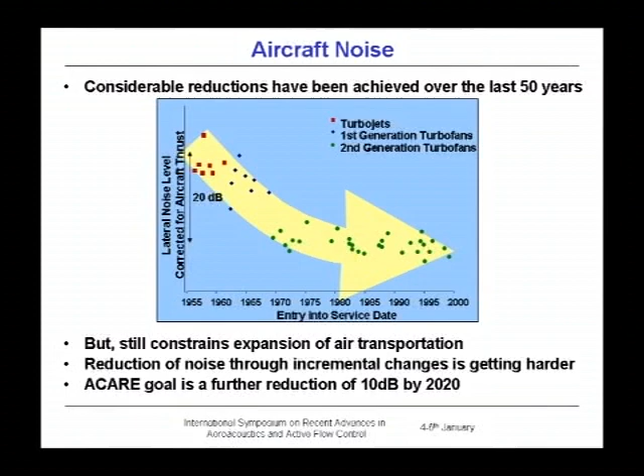I can be quick with this view graph because we've seen it already. But one message from this plot of noise against time is that some of the trade-offs from going to large bypass engines have now been cashed in, and it's getting increasingly difficult to reduce noise through incremental means. And yet aircraft noise still constrains the expansion of air traffic. No one wants an airport in their neighborhood, or even extra operational hours, or a new runway. So the predicted expansion of aerospace, significantly predicted over the next 20-odd years, could be much constrained by community objections, particularly to noise.

Now, if there's one thing I've learned from Shon Ffowcs, it's to try and ask the question in a different way. So suppose instead of saying, this is what aircraft look like, how can we model it, how can we make it quieter, we turn the question around and ask: if noise is really a constraint, what should an aircraft look like? That's what we're doing in the project that Tom and I are going to talk about today.

So we're asking, if we have as a target a radical reduction of noise, and by radical here we're thinking of an aircraft that should be imperceptible outside the airfield boundary in an urban environment. Not imperceptible in the heart of the country or over rural Wales, but in an urban environment it should not be a nuisance to the community.

Are you threatening to have an airport near me? Just a wind farm, I think.

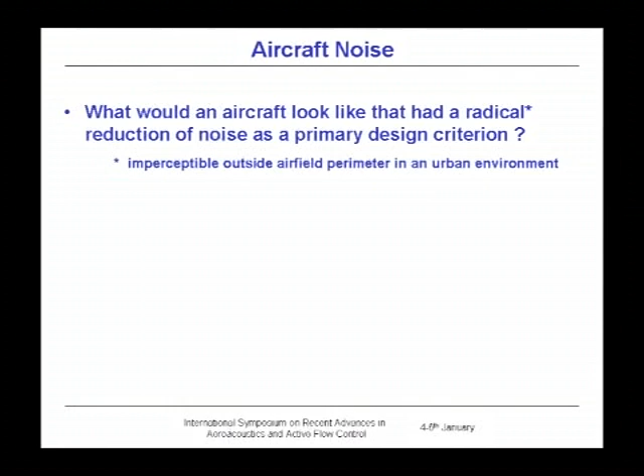In discussing this, Tom and I will be drawing on preliminary results from the Silent Aircraft Initiative, which has been running just about a year. It's a collaborative project between MIT, Cambridge University, and a growing community of partners, funded by CMI, the Cambridge MIT Institute.

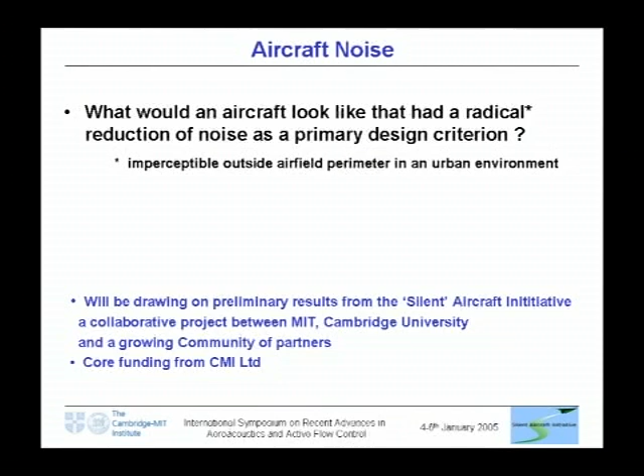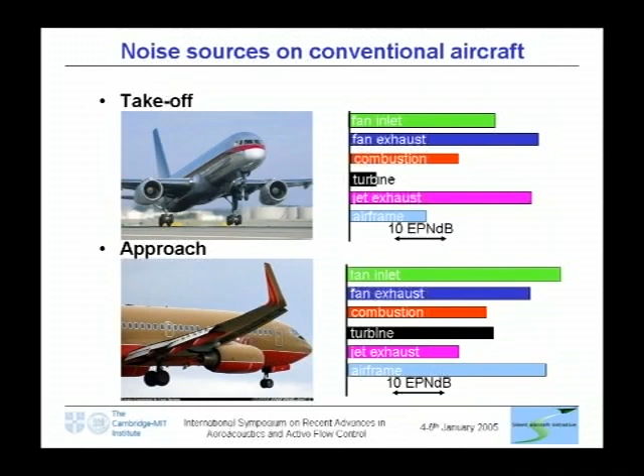Again, we've seen this one already. The message here is that at takeoff, fan noise and jet noise are really important. On approach, the fan is off-design, becomes even more important, and we've got a large contribution from airframe noise. So what can we do about those?

Well, first of all, design with low noise operations in mind is absolutely crucial, considering how the aircraft will be operated in order to minimize noise, feeding into the design very fundamentally. To achieve any of this, we're going to need much greater integration of airframe and engine, for example using the airframe to shield engine noise from listeners on the ground, and also to provide room for extensive acoustic liners.

Current ways of developing high lift just won't do. Slats are too noisy. And drag—if you think about it, an aircraft at altitude is going fast, it's got to descend and come into land.

It's got an awful lot of kinetic and potential energy to dump in doing that. Currently, that energy is dumped into the air, into unsteady motion in the air, in really noisy ways. The pilots lower the undercarriage much earlier than they need to for operational means, to get the drag up so they can dissipate some of their potential and kinetic energy. Flaps are used, again, almost like air brakes to slow the aircraft down, but these are noisy ways—that energy is going into unsteady air motions in a way that's noisy.

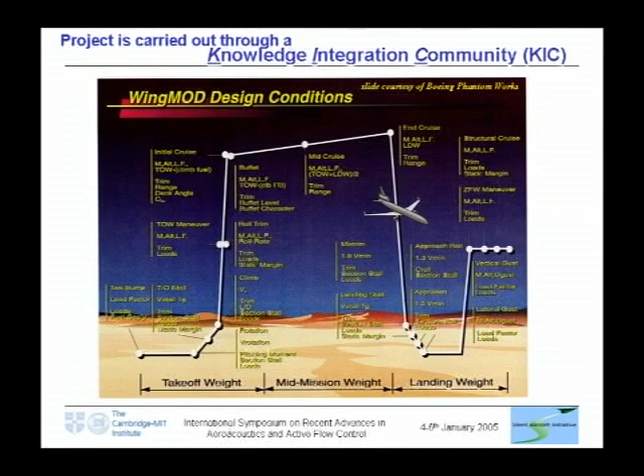On the engine side, we have installed in Cambridge Rolls-Royce's performance code, Genesis, and an in-house noise prediction, VN02. We're using this where we can, along with our own models and other models from the literature, where we move away from current practice.

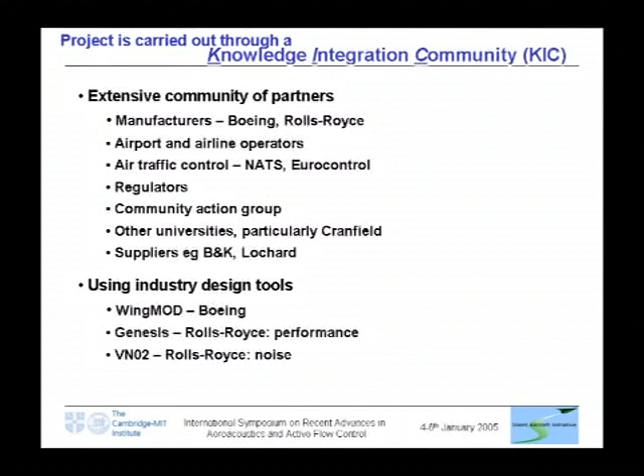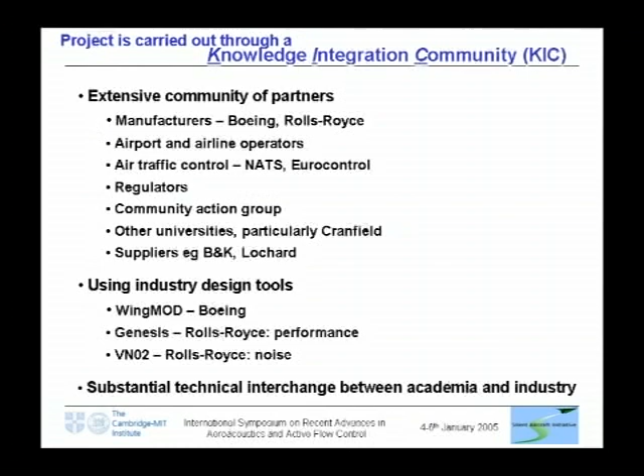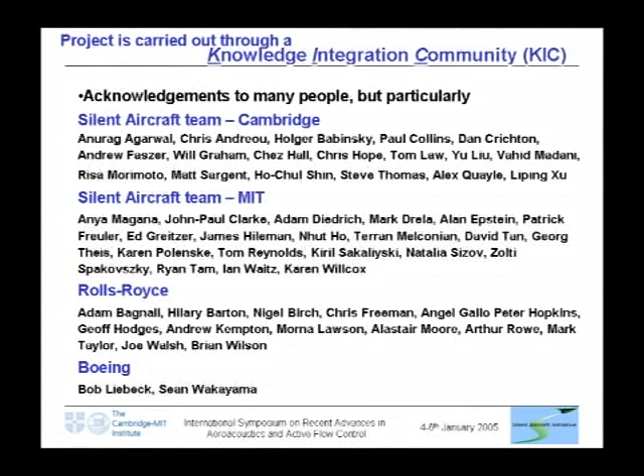Throughout this project, there's been substantial technical interchange between academia and industry. This isn't something universities can do on their own. On the other hand, industry doesn't often have the motivation to take such a long-term view as we're able to do in this project. That means there's a whole range of acknowledgements to people who've contributed ideas and calculations to this work.

So the framework of the project - I started by saying how important the way an aircraft is operated will be to meeting these noise constraints. We have an ops group, but also an economics group looking at the impact on airline economics from operating a silent aircraft, increased operating hours, quicker turnaround, and so on. Right at the heart of the technical design is the aircraft integration, which has a substantial acoustics aspect, so we try to maximize these benefits from shielding.

We've got a team looking at technologies for quiet airframes and novel engine architectures for low noise. We have to set the size of our aircraft, and we asked our industry partners what they would recommend as a mission for this conceptual design. Their advice was to go for the smallest aircraft that could be scaled up. And since we're looking for some shielding effects, it can't really be too small.

Based on that, plus a credible market from the airline economics people, and also looking for something that's technically feasible, we've set ourselves an absolute target of imperceptible. That gets harder, obviously, the bigger the aircraft. So we've actually gone for a 250 passenger aircraft, a range of 4,000 nautical miles, and a cruise Mach number of 0.8.

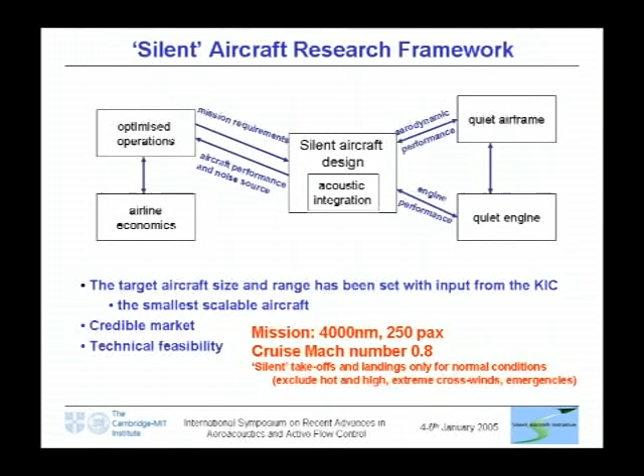It will have a silent mode of operating takeoffs and landings, but only under normal conditions. In other words, if it's hot and high, or there are extreme crosswinds, or any emergencies, the aircraft could land in a different mode, which would be noisier. So silence only under normal operating conditions. And of course, it has to do this while still meeting the requirements of being competitive in terms of fuel efficiency and reliability and so on.

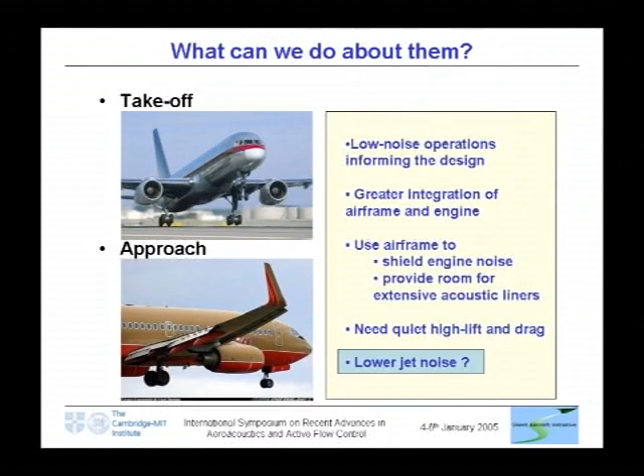These ideas on operations and shielding and more extensive liners will get us over some of the noise sources. But with jet noise, the reliable way of getting that done is to reduce the jet velocity, simply because the sound goes with a high power of jet velocity and linearly on area, whereas our requirement for thrust scales on velocity squared times area.

So we're going to turn the usual question around and say: if we have this noise target of imperceptible outside the airfield perimeter, how big should the nozzles be? How big should the jet nozzle be?

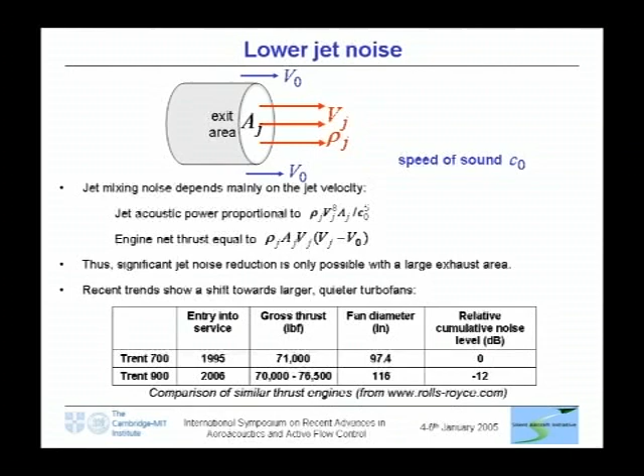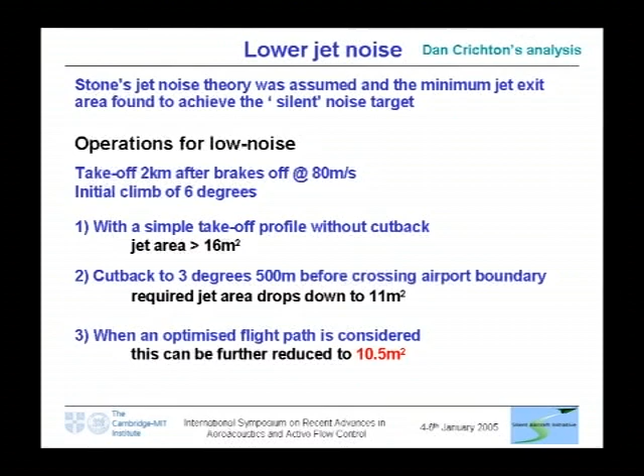Here we're using a standard prediction, which also checks out with data. If we take our noise target and initially start with a very simple takeoff profile, we come up with a jet area of 16 square meters. When we begin to optimize on operations by having a cutback and then optimizing the flight path while still meeting the legal constraints imposed by FAA, CAA, we can reduce that jet area to just over 10 square meters.

If we compare where we are with current and the next generation of engines, our target aim is to be some 25 dB quieter than that. Turning this around, if we have 4 engines, it says we need an exit area about 3 times larger - so a large exit area of engines here. The difference between the different number of engines is based on regulators' requirements as to how soon the cutback can be made given the number of engines you've got. So if we go for 4 engines, we need an exit area 3 times current technology.

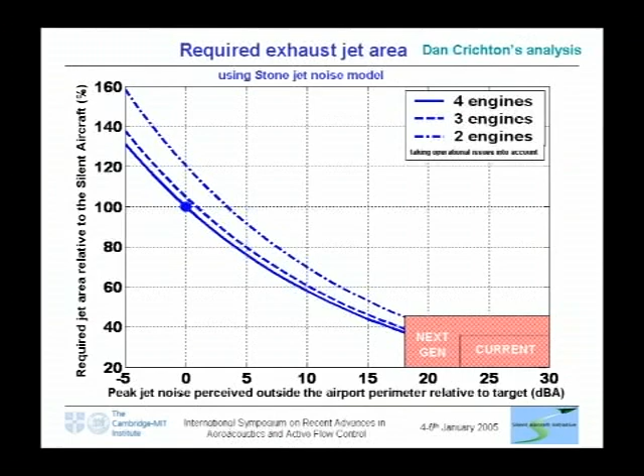So what would those engines look like, and how can they behave well in cruise, and how can they actually be fitted onto an aircraft? At this stage, I'm going to toss that as a challenge across to Tom, who will pick up from there.

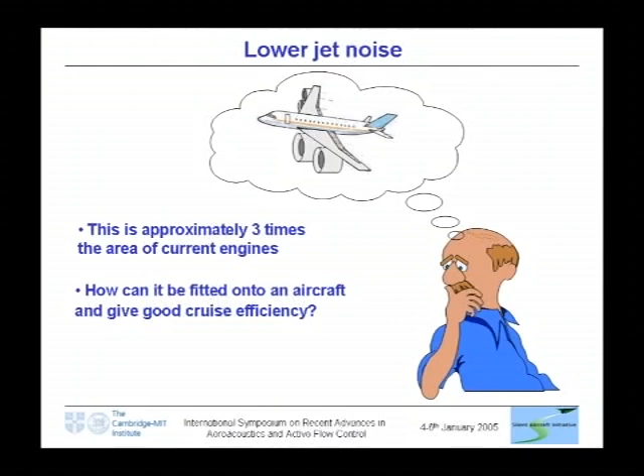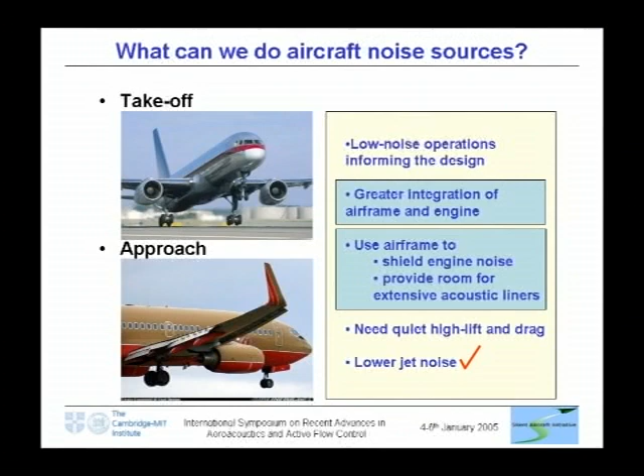As Anne says, these engines are approximately 3 times the size of current engines. So if we go this route, then in theory we've solved the jet noise problem. And we have these other issues to deal with.

In order to get a very large engine inside an aircraft, and in order to go for an aircraft shape which will give us the required amount of shielding that we're looking for, we've been working with Boeing on some of their futuristic designs, potentially blended wing body.

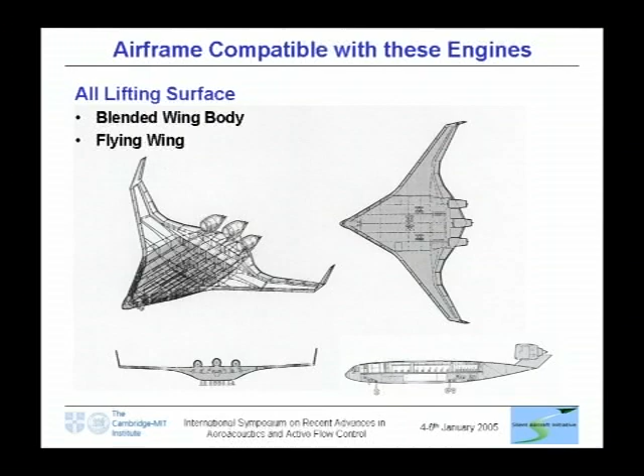So these are big engines, about 2.5 to 3 times the size of conventional technology. If you look at where you could stick these engines on the airframe, the Boeing designs actually had some engines up above the wings, but you might also consider burying these engines.

This is, as we'll see later, the route that we would wish to go. We are going to think about putting engines in this region here. And if you look at this blended wing body shape, there's actually quite a lot of vacant space here.

One of the advantages of this blended wing shape is that there is quite a large volume within the airframe available. Our sums said we could fit between 2 and 15 engines within this 15-meter frame. This 250-seater aircraft is about the size of a 767-200, and its duty is rather similar.

If you look at current liner technology, you need somewhere in the region of 6 engine diameters in which to actually absorb the turbo machinery noise to get you down to silence.

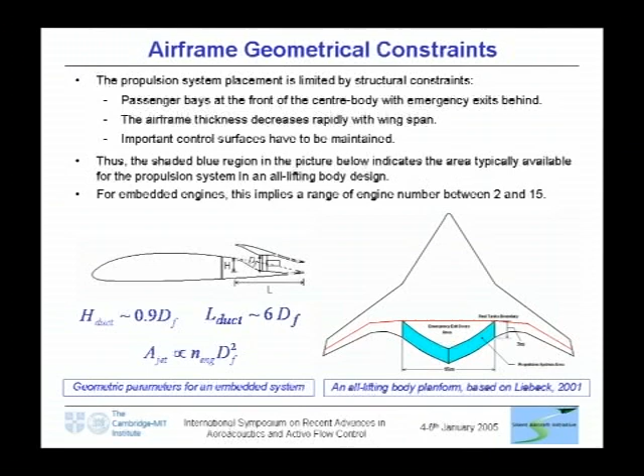We'll see later when Anne comes back that you can get quite a lot from shielding, so your forward requirements are not that great, but you do need a large section behind the engine if you are to have a chance of absorbing the turbo machinery and the jet core mixing noise.

So the question is, how would you stick the engines on this airframe? The first option is to go podded, and if you had a podded engine with liners big enough to do all of the turbo machinery noise absorption needed, it would look approximately like this. This is a sketch of how big these engines would be for about a 4-engine installation.

Putting the engines up here is actually not a good thing to do for this type of aircraft design. They have a tendency to give you a pitch down moment. It's quite a problem keeping the nose up, so putting the engines up here is a poor move.

The large wetted area of this type of installation is really going to hit you, and the pylon weight and increased structural weight to hold the engines there is a serious issue. But sticking the engines up there does put them in the clean flow, and in theory, if you haven't embedded them, you can get at them easily for maintenance.

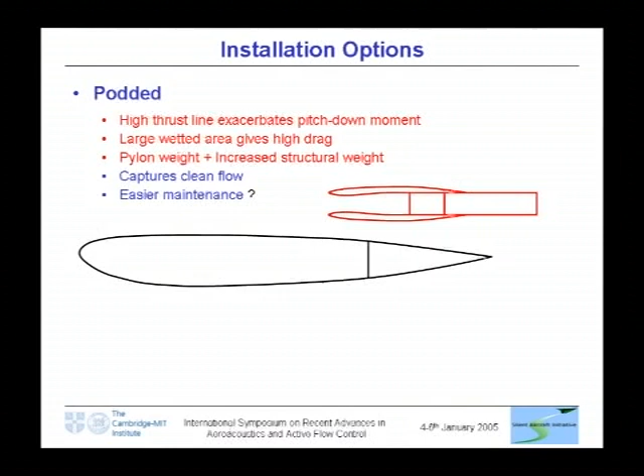Other options you have are to start bringing the engine down, and you might think about having this engine partially embedded.

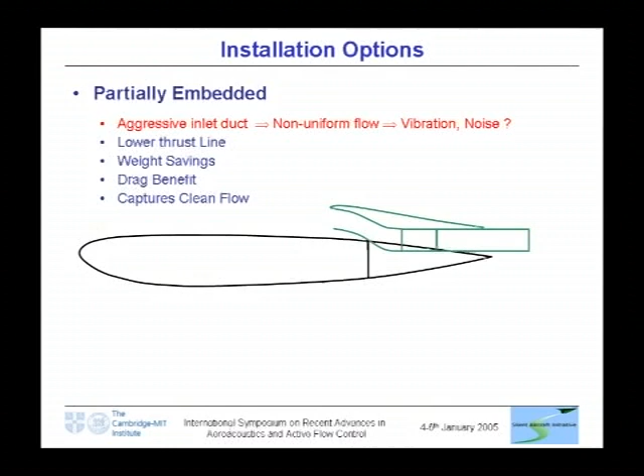You've lowered the thrust line, so Boeing are quite happy that it enables them to maneuver this aircraft a little better. There are weight savings because you don't have the pylon and all the support structure at the back end needed to survive a crash. And there is a drag benefit because you've started to bury some of this area here, while you're still capturing clean flow.

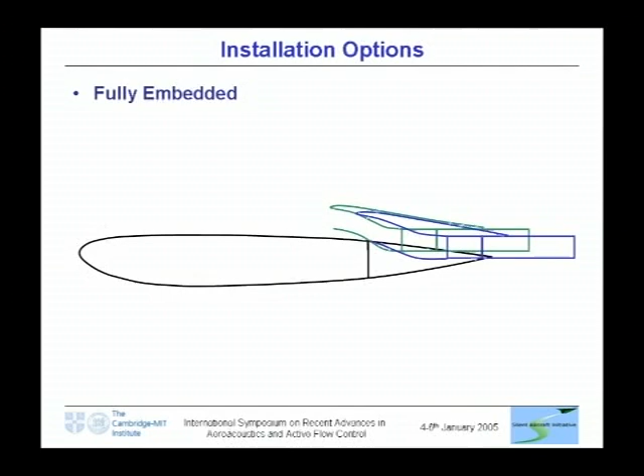We would like to go further than that, though. We would like to think about engines which are actually fully embedded. And this again is a lower thrust line. So again, there's a trade-off there.

And now there's a further drag benefit. This means that you've effectively got the bottom half of this nacelle counting as part of the airframe, so there is no drag on this part. There will be a significant drag benefit by dropping the engines further, and of course we've got the lower thrust line.

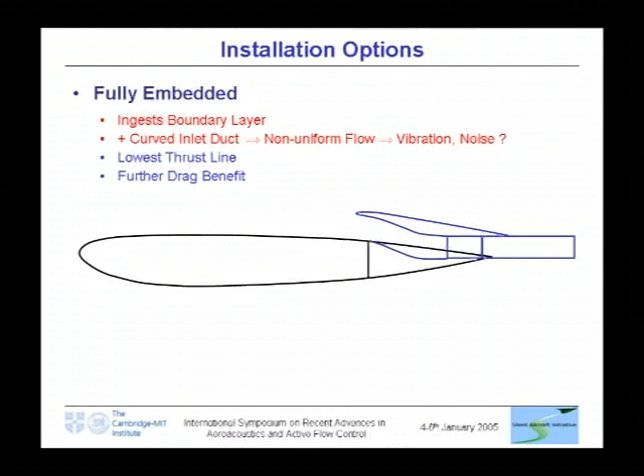The disadvantages are that you have to cope with an inlet boundary layer now, being ingested over the airframe, and that, added to the curvature in the duct, can give you big inlet distortion problems and potentially non-uniform flow reaching the engine. But if you think in terms of fuel burn, there is an advantage in doing this.

If instead of taking clean flow and accelerating it to a high jet velocity, you take flow which has been slowed down by the airframe and re-accelerate that, then for a given momentum increase you're accelerating to a much lower speed than if you'd taken clean flow and shoved it out as a higher jet. So there's a propulsive efficiency benefit to doing this.

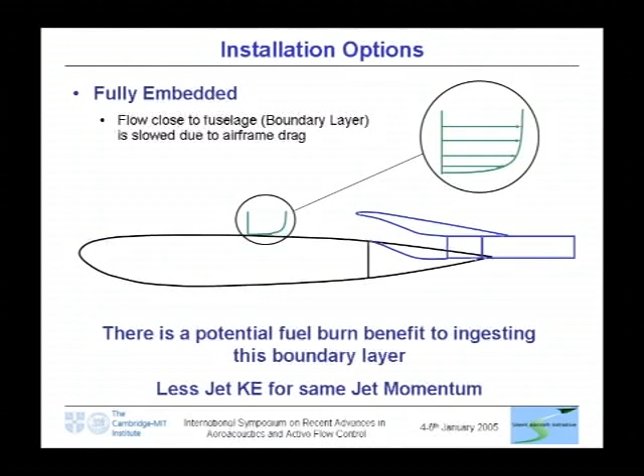So there are other reasons why you would wish to do this if you can get away with it - a fuel burn advantage. We have these problems with these large engines, and the big problems are to do with the size of them.

The area is approximately 3 times existing, which comes down to about 2.5 times the engines planned for the 787. And that corresponds to a fan diameter of about 1.7 times existing, 1.6 times planned.

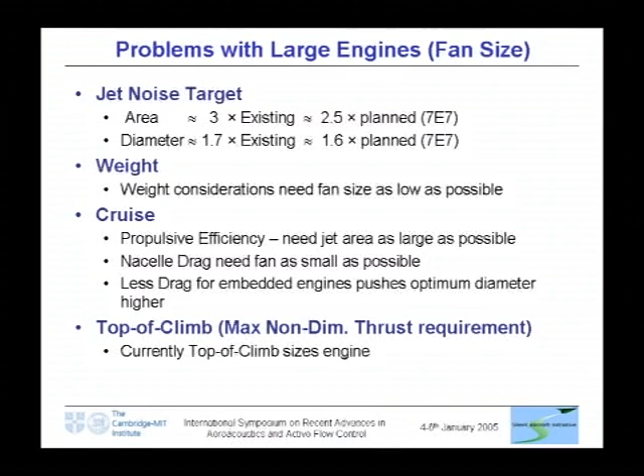We have the usual problems the aero engine manufacturer has to juggle: you want good cruise performance, so propulsive efficiency; the engine will be sized for top of climb, which is the maximum non-dimensional thrust requirement and where it's operating at highest non-dimensional speed; and you always wish to keep the weight as low as possible.

So large fans are an immediate hit on weight, and the fan size is effectively the overall driver as far as weight is concerned. You can look at how weight varies with fan diameter - it goes like some power of fan diameter, not quite 3, but about 2.5.

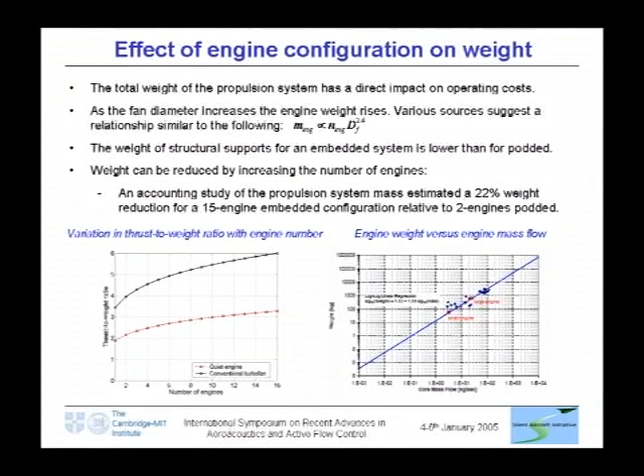But there are some advantages to going to a larger number of smaller engines. The studies we did showed that if you went for a large number of small embedded engines, you would save about 22% of the total engine weight compared to 2 podded engines.

Now, in terms of actually choosing the fan diameter, you have to ask the question: if this is 1.6 times what people have planned in the future, why did those decisions come about, and what are we doing that's different, and how are we going to get around this?

If your engines are podded, the more engines you have, the bigger wetted area you have, and the bigger the hit on nacelle drag is. So the driving force is to go to a smaller number of engines.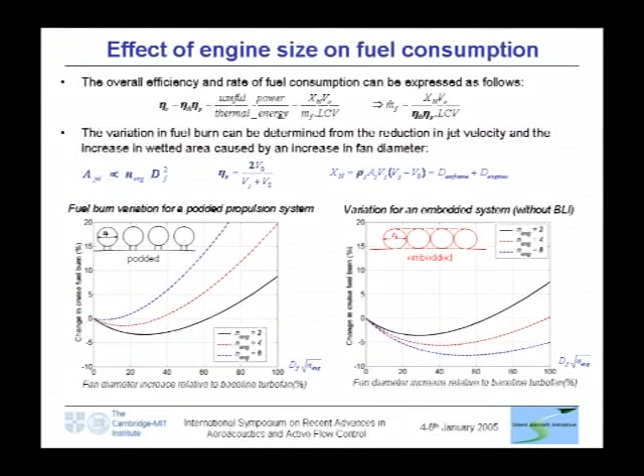So of that 1.6 hit necessary to make these engines silent, the decision to embed them means that hit is now only about 40%. The engine is still sized for top of climb, and still has to meet these various requirements. And once you've chosen an engine fan diameter, then the fan pressure ratio comes out of the wash.

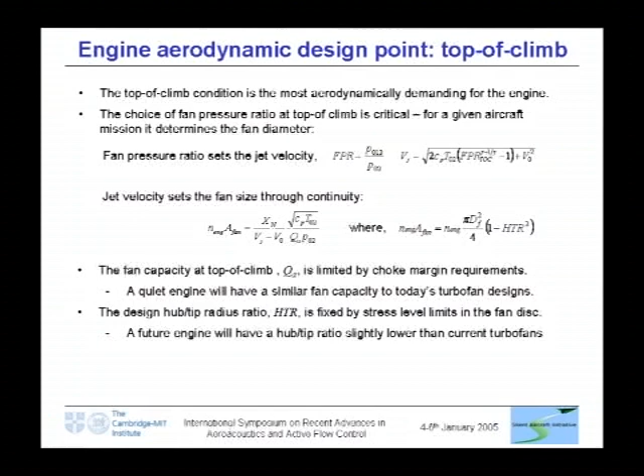We have to get these engines off the ground with maximum jet area, minimum jet velocity. So the design requirement for us is good fuel consumption at altitude, but maximum engine flow capacity at takeoff, with the engine sized for top of climb, not too compromised.

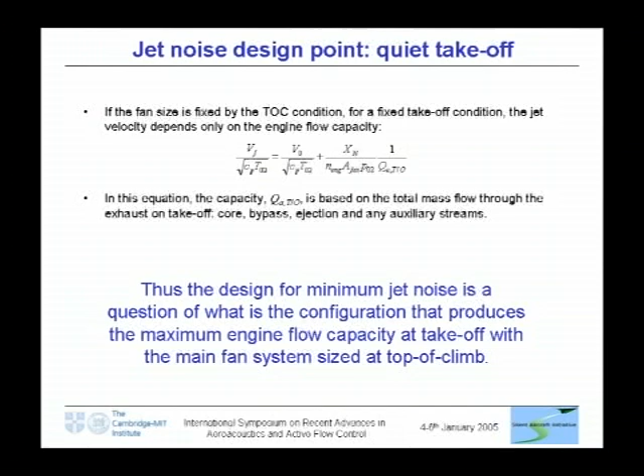At the moment, you'd be thinking of a compromise of about 40% increase in fan diameter. Now, when you go to these high bypass ratio engines, you have significant problems, and I'll run through some schematics to show you how engine manufacturers get around these at the moment.

As you increase the fan, it has to live somewhere on the fan pressure ratio, fan capacity map, and as you increase the speed, the engine performance moves up according to the arrow I've drawn. You're limited to stay in the stable region, limited by fan surge considerations and flutter, etc., which also hit you somewhere up in that region.

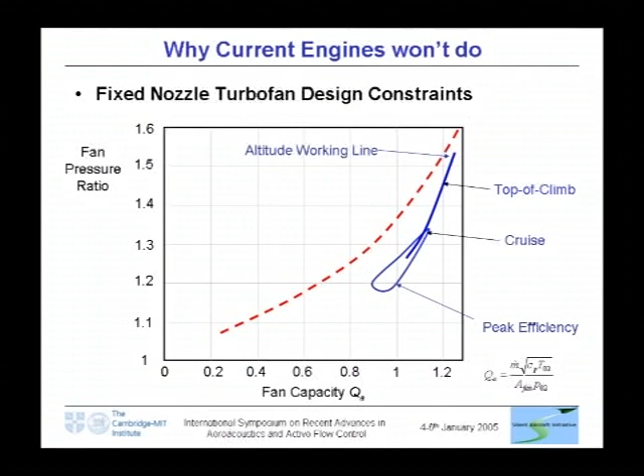The highest efficiency tends to be in this sort of region, and you would like the top of climb and the cruise, the altitude working line, to be as close as possible to this peak efficiency region. Top of climb is the highest design point on the engine thrust cycle. Cruise is somewhere around here, around about peak efficiency.

But the problem with high bypass ratio engines is when you come down to takeoff, if you've got a fixed area nozzle, the takeoff working line tends to be right up and probably the wrong side of the surge line. So what people are doing at the moment is compromising that efficiency by dropping the top of climb cruise in order to get the takeoff working line somewhere in this region.

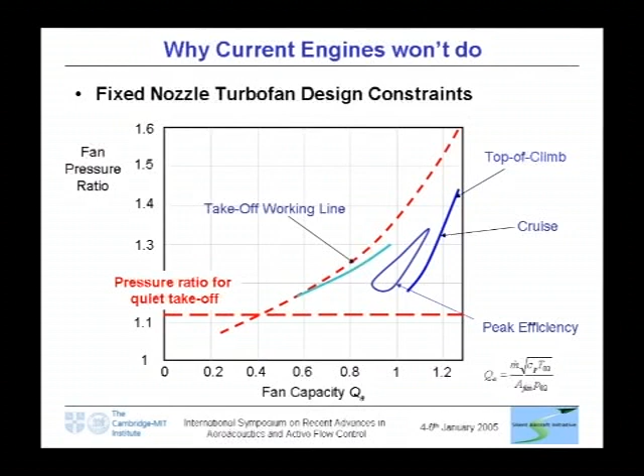On this scale, what we want to do now is add our pressure ratio for quiet takeoff. And low jet velocity, low pressure ratio at takeoff, we would like to be somewhere down here. And you cannot do this. Okay, but you can do this if you decouple the altitude performance from the takeoff requirements.

And so you can do this if you go for some sort of variable cycle engine. The simplest variable cycle engine is to think about a nozzle opening and closing. With the nozzle closed, you can take the optimum design point, peak efficiency, and best optimum fan size at top of climb. Then if you open the nozzle for takeoff, you can actually...

So you're operating this engine as if it was a ducted propeller, and the installation is simply to absorb the noise. By opening the nozzle right up, you can actually operate right down here. So this saves you about another 20% in fan size.

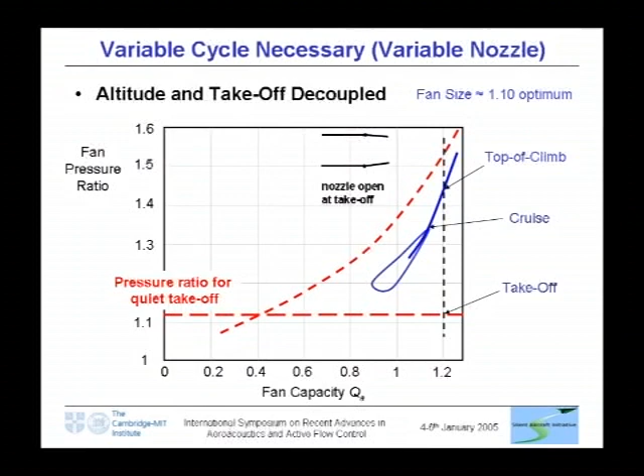So in terms of optimum fan size, we're now just talking about an engine which is about 10% fan diameter bigger than you would have chosen if you had gone the traditional route.

Our exercise has been taken through using the Rolls design tools, and we've actually designed a fan to do this. You'll see that our bypass ratios are up around about 15.5 to 1 at top of climb. Fan pressure ratio top of climb is 1.45. If you think about future generations of standard turbofan engines, they're on about 10 or...

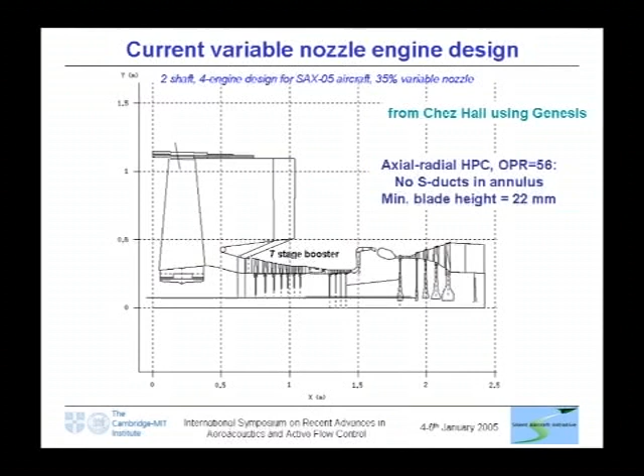11. We've designed this. High bypass ratio turbofans have a problem with small blades, and so we've put in some radial turbo machinery there to try and get around that. Towards the back of the annulus here, we've actually got some radial turbo machinery.

And you cannot get this sort of bypass ratio without some sort of gearing. This design for our engine is a 3-to-1 geared fan. This fan is, as we've said, about 85 inches in diameter. And the gearbox is around about 3-to-1.

And this is not desperately different to the requirements of, say, something like the Pratt & Whitney 8000 gearbox requirements. So these are all well within the current extrapolatable technology. And the SFC is actually competitive.

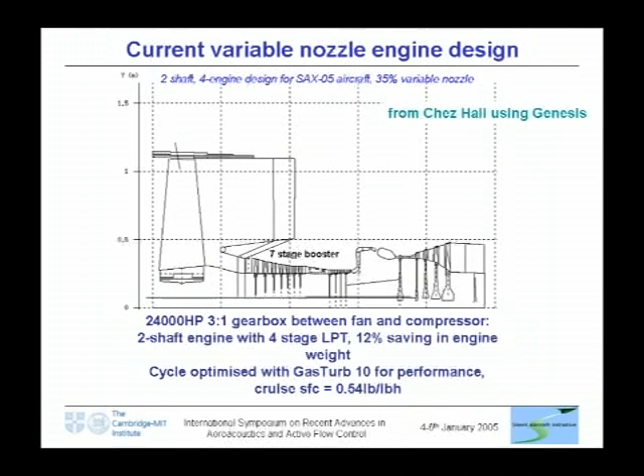In terms of number of engines, the studies that we've been doing, we'd actually like to go to a large number of engines, but the difficulty is actually getting the flow into them. There is a serious issue about getting these intakes to perform properly, and our first cut at this has been that we're going for 4 engine designs with individual intakes, simply driven by the difficulty of the aerodynamics of this pre-compression region without giving you too much drag on the back half of the airframe.

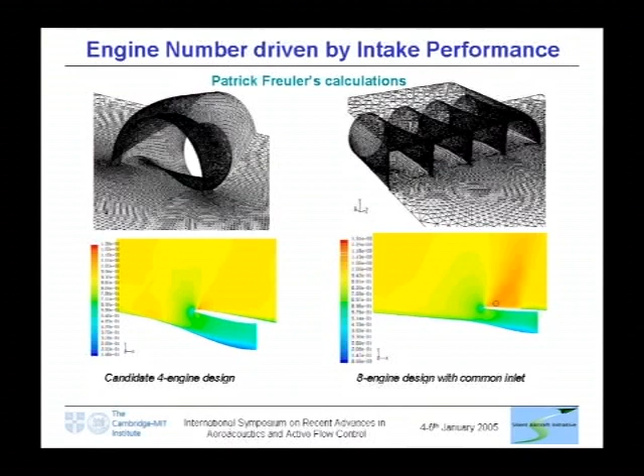We would really have liked to have gone for many engines which were actually buried with common nozzles, etc., common intakes, but that's difficult.